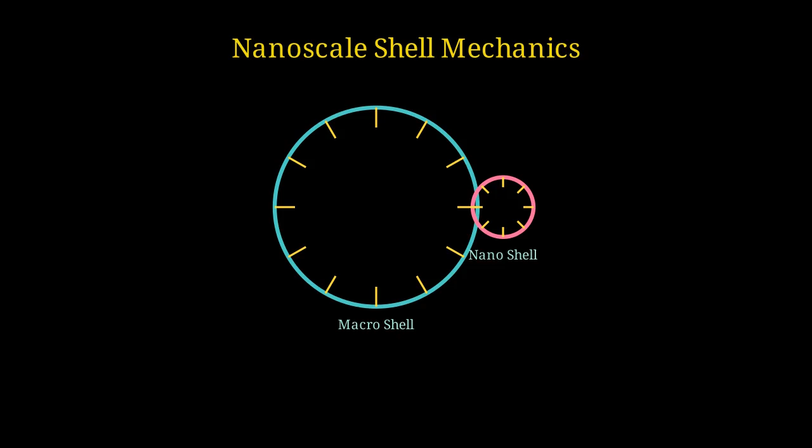Welcome to an exploration of how tiny capsules behave completely differently from their larger counterparts due to surface effects at the nanoscale. At the nanoscale, shells and capsules exhibit surprising mechanical behaviors that classical theories cannot predict. The key lies in understanding surface effects.

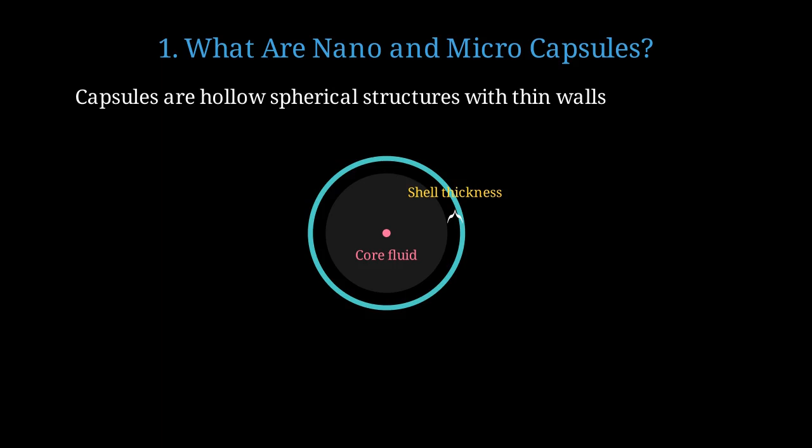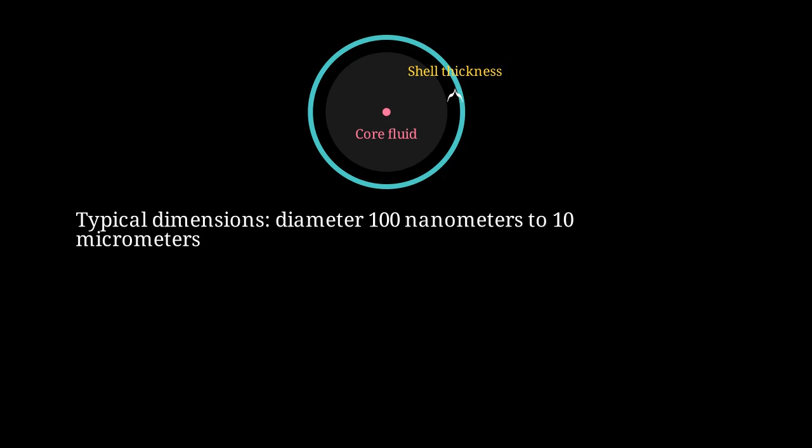Let's start by understanding what these tiny structures actually are and why they matter. Nano and microcapsules are essentially hollow spheres with very thin walls, used extensively in drug delivery, cosmetics, and material science. A typical capsule has a thin shell surrounding a liquid or gas core. The shell thickness might be only nanometers, while the diameter could be micrometers. These structures range from 100 nanometers to 10 micrometers in diameter, with shell thicknesses often just a few nanometers.

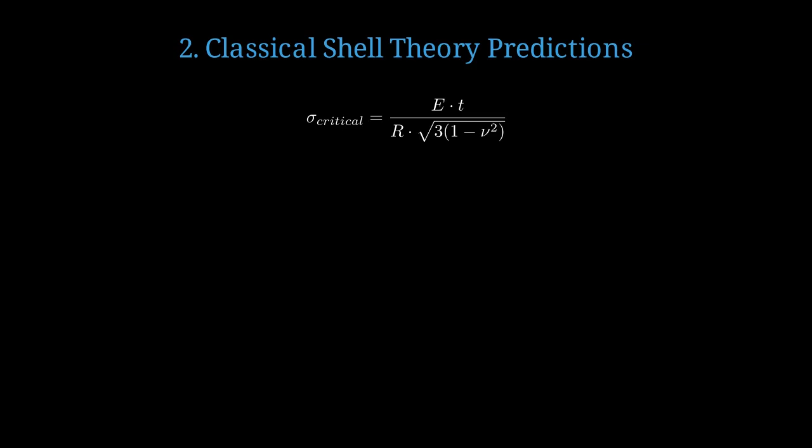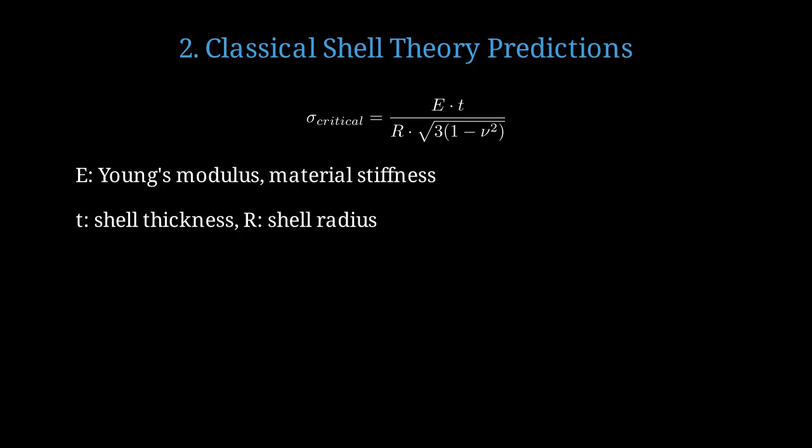Before diving into nanoscale effects, let's review what classical continuum mechanics predicts for shell behavior. Classical shell theory gives us the critical buckling stress as a function of Young's modulus E, shell thickness T, radius R, and Poisson's ratio nu. Here, E is the Young's modulus, representing how stiff the material is. T is the shell thickness, and R is the shell radius. The key prediction is that thinner shells should buckle at lower stresses, scaling with thickness over radius.

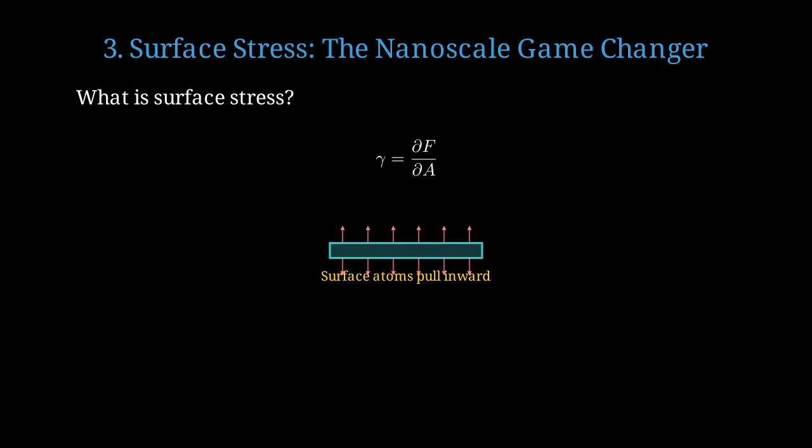At the nanoscale, a new player enters the game, surface stress, which completely changes the mechanical behavior. What exactly is surface stress? It's the excess energy per unit area at a material's surface. Surface stress gamma is defined as the derivative of free energy F with respect to surface area A. Surface atoms have fewer neighbors than bulk atoms, creating an imbalance that leads to inward tension, like a stretched membrane. For typical metals, surface stress ranges from 1 to 2 joules per square meter.

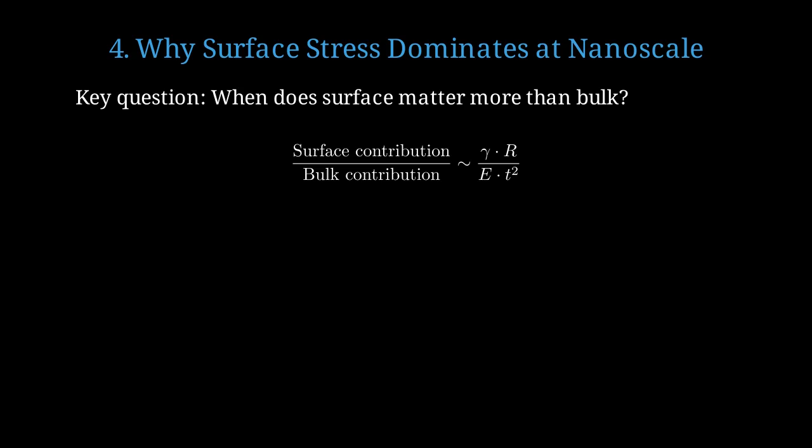Let's understand why surface effects become dominant as we shrink down to nanoscale dimensions. The critical question is, when do surface effects start to dominate over bulk material properties? The ratio of surface to bulk contributions scales as gamma times R divided by E times T squared. As the radius R decreases or the thickness T decreases, surface effects become increasingly important. As we scale down from 100 nanometers to 50 nanometers to 30 nanometers, the surface area to volume ratio increases dramatically.

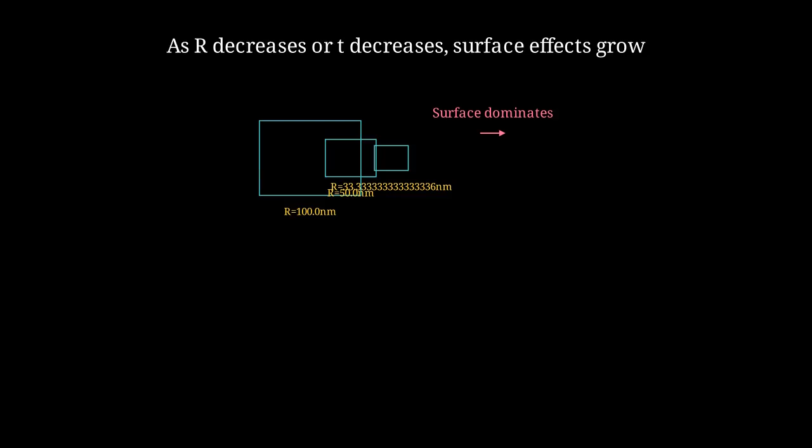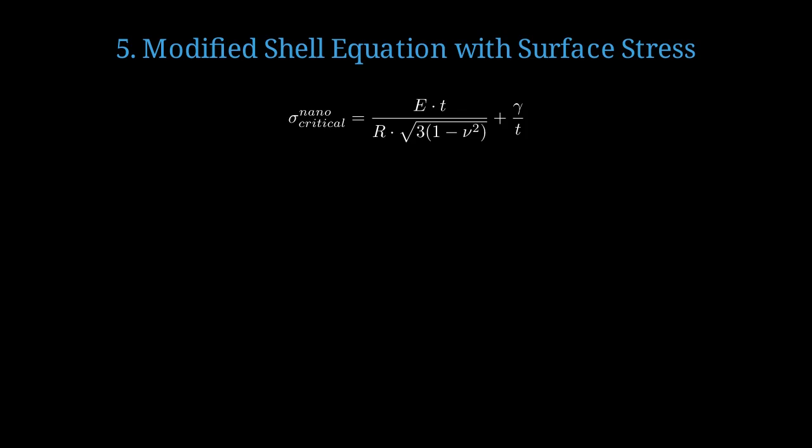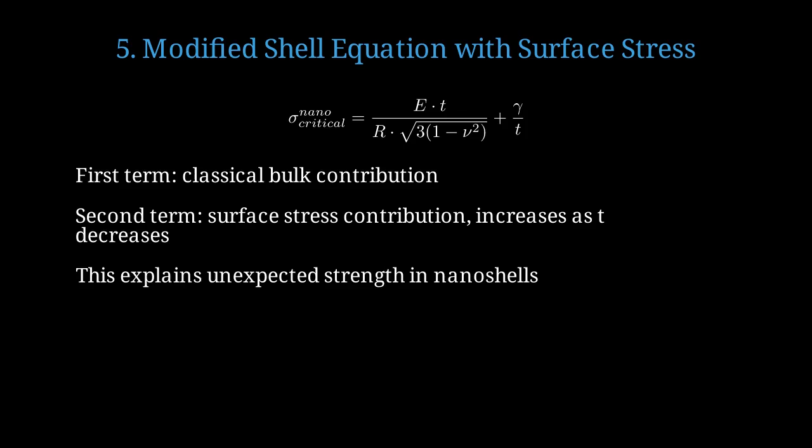Now let's see how we modify the classical shell equation to account for surface stress. The modified critical stress equation adds a surface stress term, gamma over t, to the classical expression. The first term is the classical bulk contribution we saw earlier. The second term is the surface stress contribution, which dramatically increases as shell thickness decreases. This additional term explains why nanoshells can be surprisingly stronger than classical theory predicts.

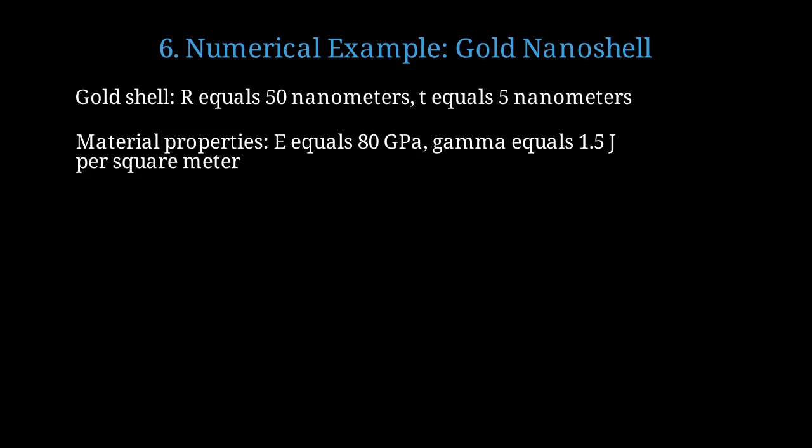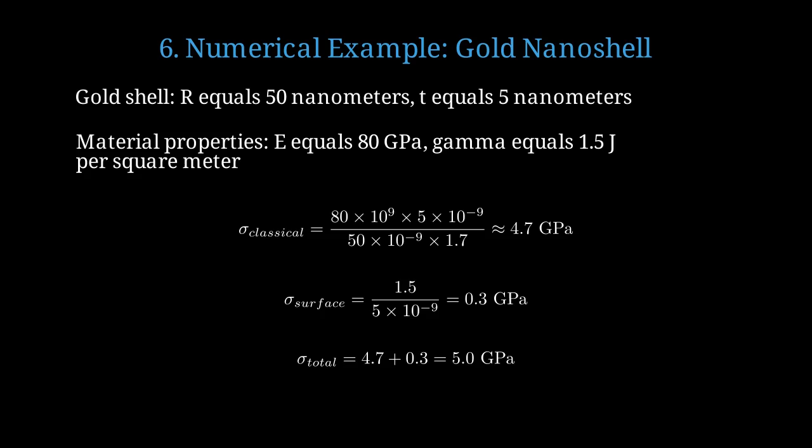Let's work through a concrete numerical example using a gold nanoshell to see these effects in action. Consider a gold nanoshell with radius 50 nanometers and thickness 5 nanometers. Gold has a Young's modulus of 80 gigapascals and surface stress of 1.5 joules per square meter. The classical prediction gives us a critical stress of approximately 4.7 gigapascals. The surface contribution adds another 0.3 gigapascals. The total critical stress becomes 5 gigapascals, about 6% higher than classical theory predicts.

If we reduce the thickness to just 2 nanometers, the surface contribution jumps to 0.75 gigapascals, a 16% increase.

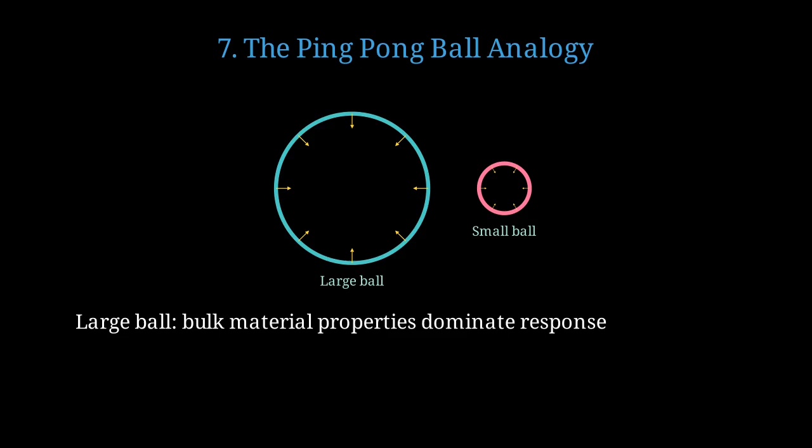Let's use an intuitive analogy to understand why small shells behave so differently from large ones. Think of squeezing a large ping-pong ball versus a tiny one. You apply the same pressure, but they respond very differently. For the large ball, the bulk material properties of the plastic dominate its mechanical response. For the tiny ball, surface tension becomes a significant additional factor that stiffens the structure. The small ball might either collapse at unexpected pressures or resist deformation more than you'd predict from scaling laws alone.

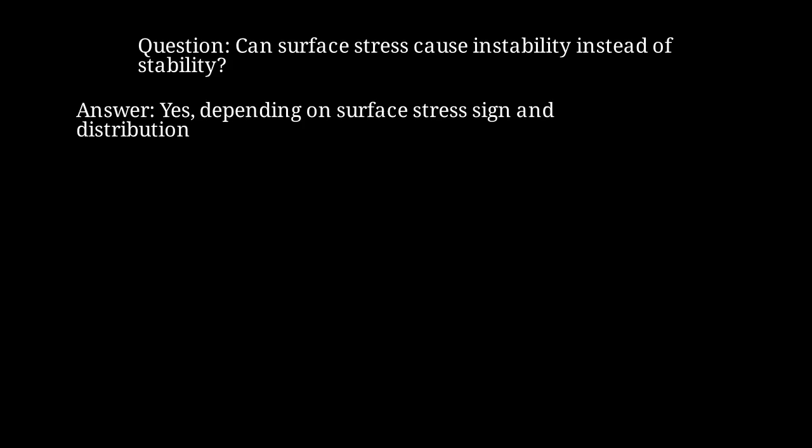Now let's examine how buckling instability manifests differently at the nanoscale. An important question: can surface stress actually cause instability rather than always providing stability? The answer is yes. Depending on whether surface stress is tensile or compressive and how it's distributed, it can destabilize structures. Buckling creates a wavy deformation pattern. At the nanoscale, surface energy changes during buckling can either resist or promote this deformation.

The change in surface energy equals surface stress gamma times the change in surface area. Buckling typically increases surface area, which raises the energy barrier and can stabilize the shell. However, if surface stress is inhomogeneous or has specific orientations, it can actually lower the buckling barrier.

Nanopores in shell walls introduce additional complexity to the mechanical behavior. Porous shells have small holes distributed throughout, and these nanopores drastically alter mechanical properties.

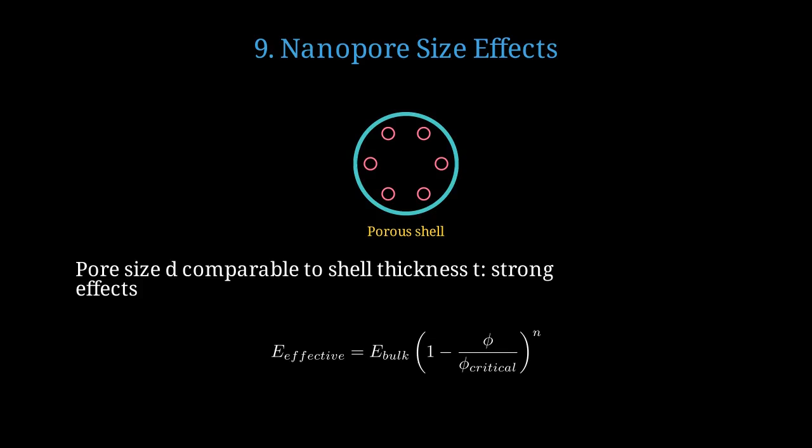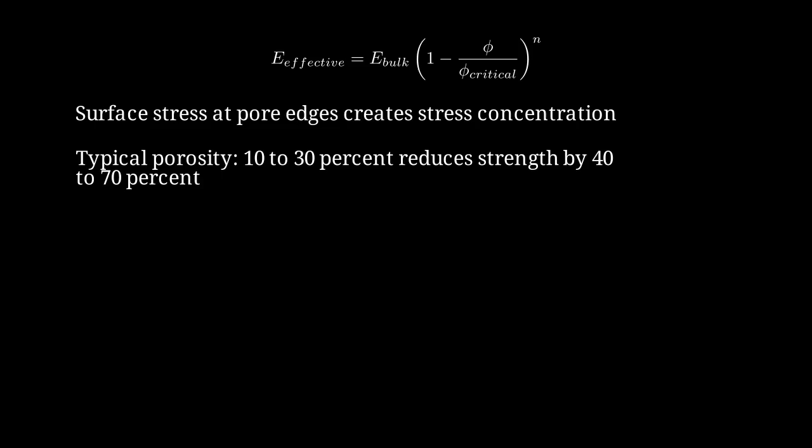When pore diameter d is comparable to shell thickness t, we see very strong effects on mechanical properties. The effective modulus decreases with porosity phi according to a power law, where phi critical is the percolation threshold. Surface stress at pore edges creates stress concentrations that can initiate failure at lower loads. A typical porosity of 10 to 30% can reduce shell strength by 40 to 70%.

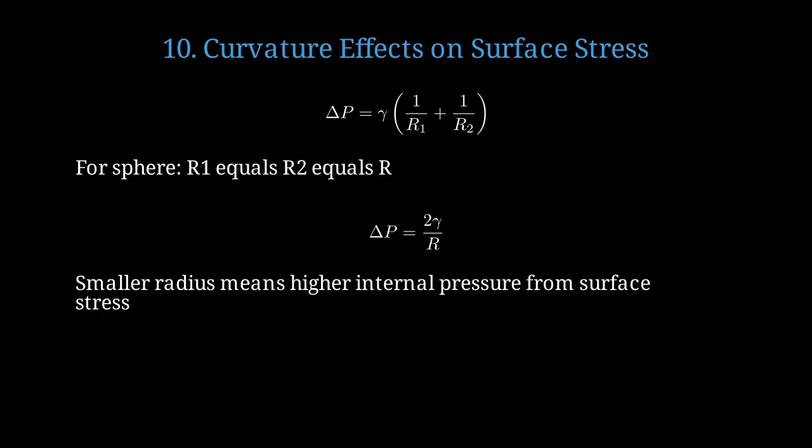Shell curvature itself modifies surface stress through the Laplace pressure effect. The Laplace pressure equation shows that pressure difference equals surface tension times the sum of inverse principal radii. For a sphere, both principal radii are equal to the sphere radius r, which simplifies to delta P equals 2 gamma over r for a spherical shell. Smaller radius means higher internal pressure purely from surface stress effects.

At nanoscale, multiple competing effects determine whether shells are stronger or weaker than predicted. Strengthening factors include surface stress and beneficial prestress, while weakening factors include defects and porosity. The net effect depends on the specific material, size scale, degree of porosity, and defect concentration. An important practical question: which effect dominates for typical drug delivery capsules? For sizes below 50 nanometers, strengthening from surface stress usually dominates, making capsules more robust than expected.

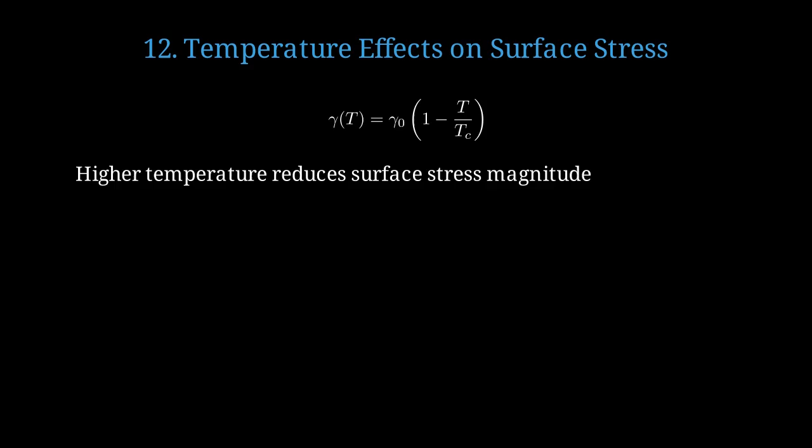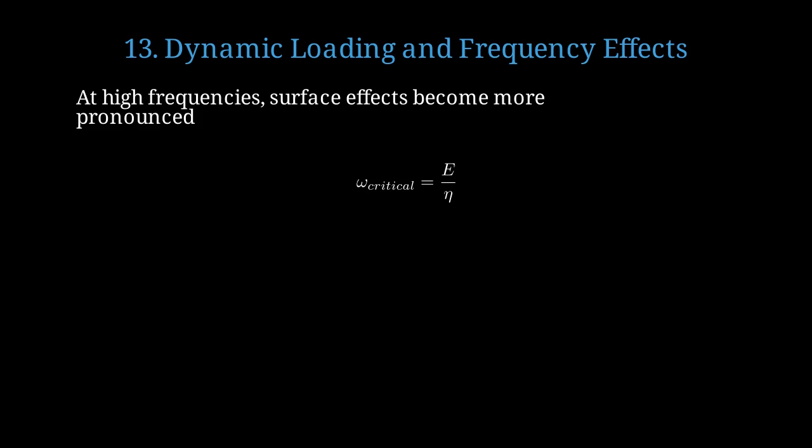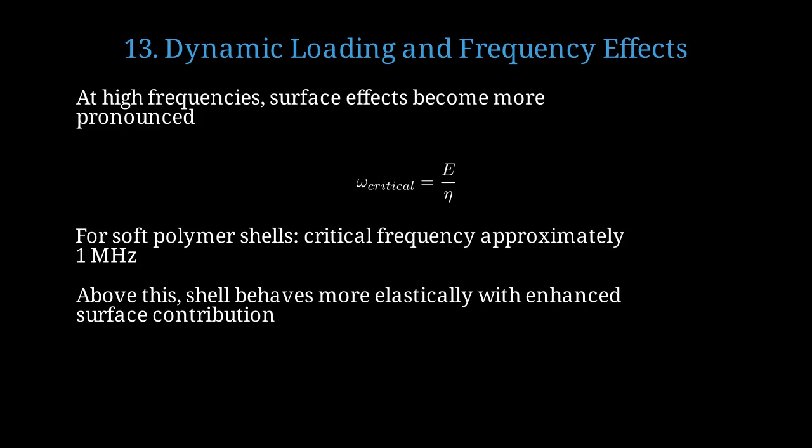Dynamic loading at nanoscale introduces viscoelastic effects and frequency-dependent behavior. At high loading frequencies, surface effects become even more pronounced because bulk relaxation is slower. The critical frequency equals Young's modulus divided by viscosity eta. For soft polymer shells, the critical frequency is typically around 1 MHz. Above this frequency, the shell behaves more elastically with an enhanced surface stress contribution.

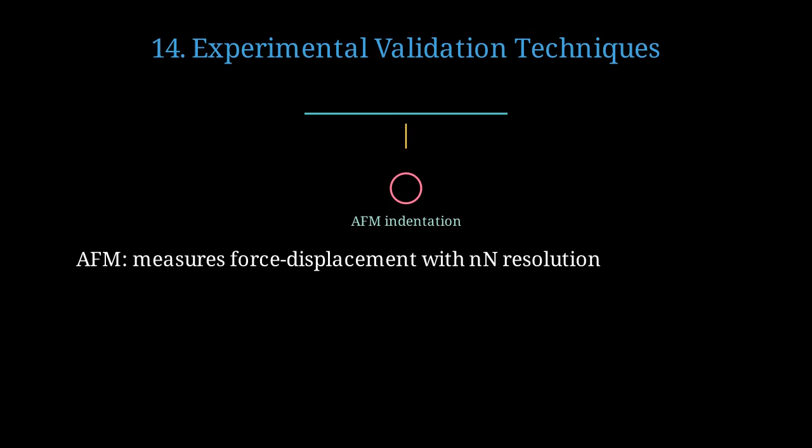How do we actually measure these nanoscale mechanical properties experimentally? Atomic force microscopy allows us to indent individual nanocapsules and measure force displacement curves with nanonewton resolution, down to sub-nanometer precision in displacement. Optical tweezers use focused laser beams to trap and compress microcapsules while measuring deformation. Micropipette aspiration sucks capsules into tiny pipettes to measure shell elasticity and critical pressures.

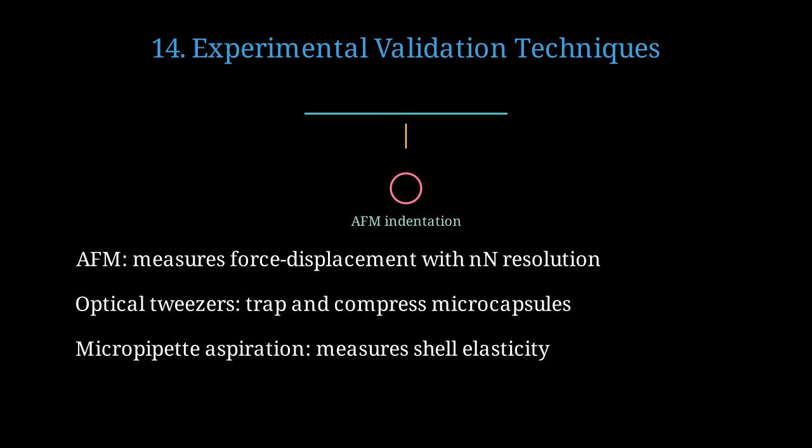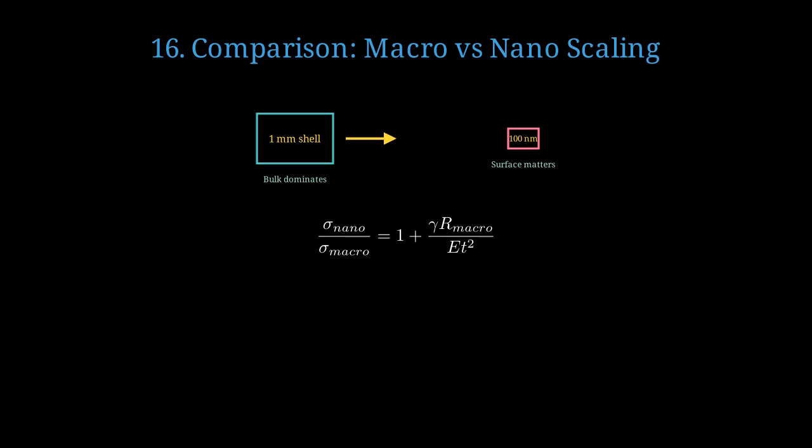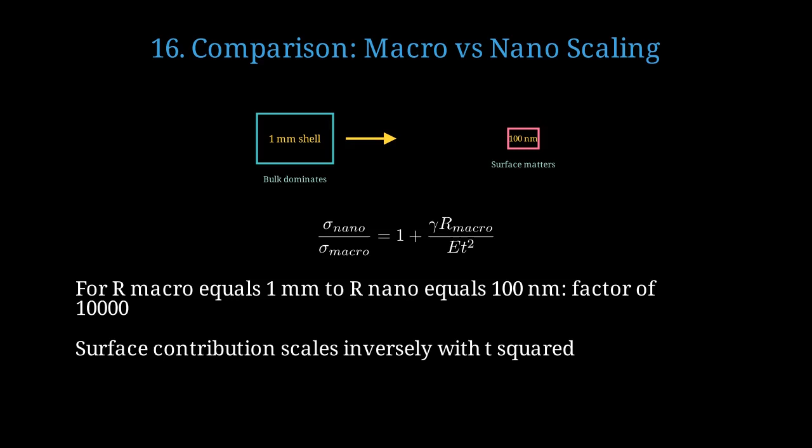Let's directly compare how mechanical properties scale from macro to nanoscale. A 1 mm shell is dominated by bulk properties, while a 100 nanometer shell has significant surface contributions. The ratio of nano to macro critical stress equals 1 plus a term with gamma times macro radius over E times T squared. Going from 1 mm to 100 nanometers represents a size reduction factor of 10,000. The surface contribution scales inversely with thickness squared, becoming huge for thin nanoshells.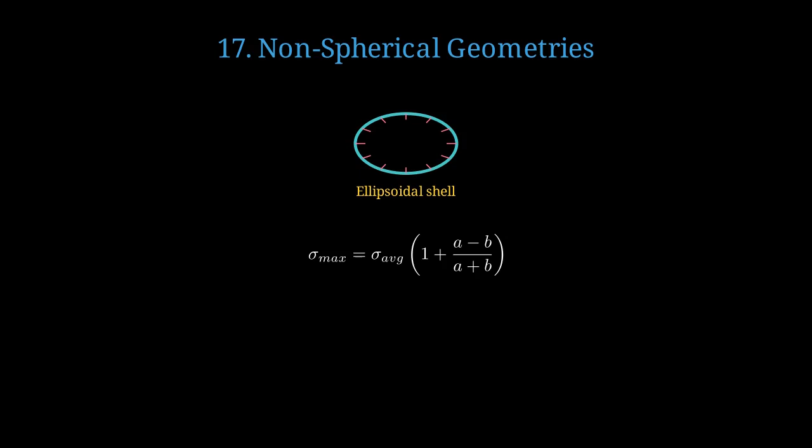Real nanocapsules often deviate from perfect spheres, adding geometric complexity. Ellipsoidal shells have two different principal curvatures, creating non-uniform stress distributions. The maximum stress equals average stress times a factor depending on the aspect ratio of semiaxes A and B. Regions of higher curvature experience stronger surface stress effects, creating weak points. Buckling often initiates at these high curvature regions, where stress is concentrated.

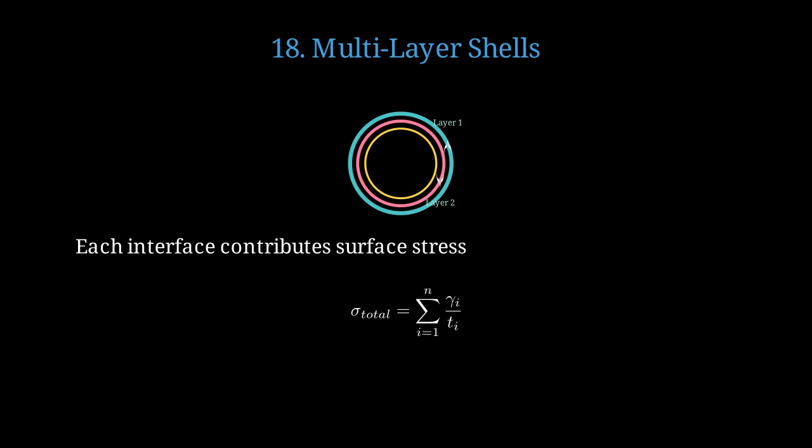Many advanced nanocapsules use multilayer shells to optimize mechanical and functional properties. A multilayer shell has distinct layers with different materials and properties, each with its own surface stress. Each interface between layers contributes its own surface stress, with signs depending on material compatibility. The total stress contribution is the sum over all layers of gamma I divided by thickness Ti. Engineers can create beneficial compression or tension by carefully choosing layer materials and thicknesses.